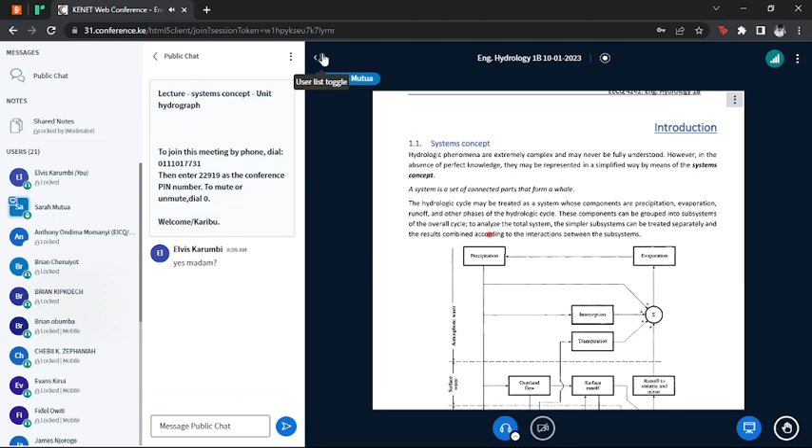A watershed is a very critical component of hydrology, especially surface water hydrology, because that is where the interactions of water occur. The watershed also includes the physical framework of hydrology, the surfaces on which water flows.

Those surfaces differ based on the types of soil, the types of land uses, and the slope. All those things determine how the water flows.

So if we add rainfall, imagine where you are, we account for all processes so that we account for all components of the hydrologic cycle.

It is rather a little bit complex.

Normally, in a very basic way of analyzing the hydrologic continuum, or the hydrologic landscape, in simple terms, we imagine the hydrologic landscape as a system.

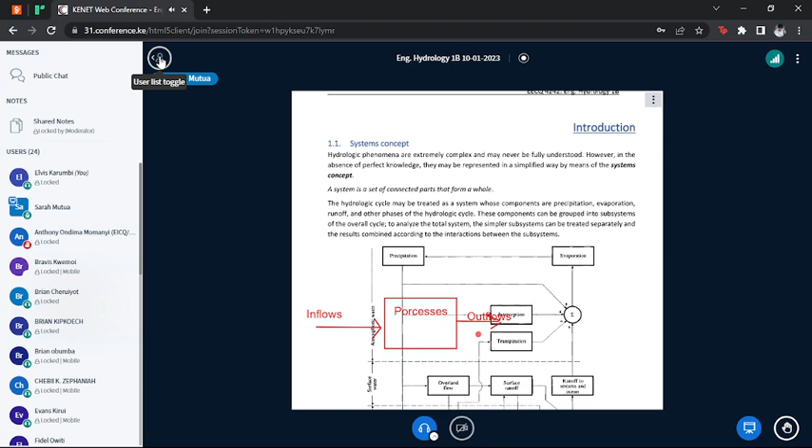If we remember generation of excess rainfall, there are a number of ways, for example the runoff coefficient method, whereby we have rainfall, then we lump together all processes through the runoff coefficient, which is usually a fraction between 0 and 1, and the outflow is the excess rainfall that generates overland flow. That is a basic example of a systems concept.

Why do I introduce it? Because we are going to apply it everywhere, almost everywhere, in what we are going to tackle, apart from the probability part.

When we go back to the course outline, the hydrologic flow routing is also a kind of lumped system, a systems concept. The hydraulic flow routing is based on physical principles and is a little bit more complex, but we will not be dealing with it in this course.

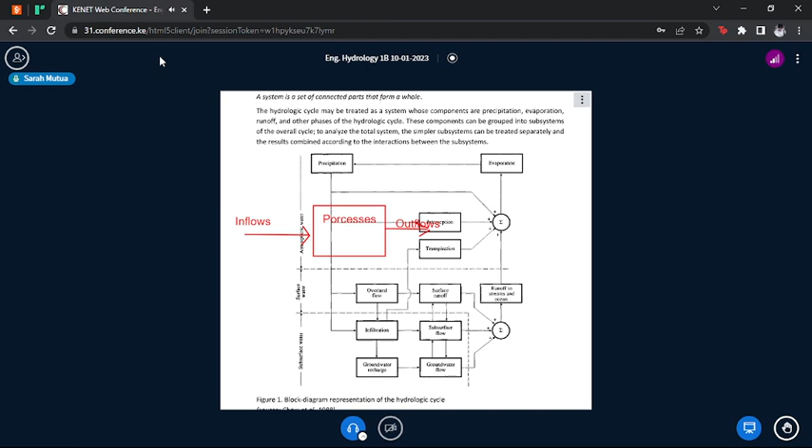Then we have subsurface water, things to do with infiltration and subsurface flow. When I talk about subsurface flow, we are talking about flow in the unsaturated zone. When infiltration is happening, there's usually a flow of water—a little bit complex because it is flow of water in a situation where the pores are not saturated. Then we have groundwater recharge.

I'm requesting you bear with me, but we have to do this.

We have groundwater recharge through percolation, and of course we have groundwater flow. Sometimes the groundwater flow, at the point where the groundwater in the shallow aquifer meets the ground surface, we have springs, and in that situation the water joins surface water.

So all this hydrologic cycle, when you look at it the way we have done it, we have created three systems: an atmospheric water system, a surface water system, and a subsurface water system, and all of them are interconnected because water moves from one system to another. You can also look at the hydrologic cycle as a whole, as a system.

Because of the complexity, when you are out in the field solving hydrologic problems, sometimes you find that you do not need to include all these components of the hydrologic cycle in your analysis. Most of the time, only a few processes are considered at a time. For example, if we want to calculate excess rainfall, we only need to know the precipitation, maybe the interception, and infiltration, so that we can calculate excess rainfall. We don't really need to know so many things.

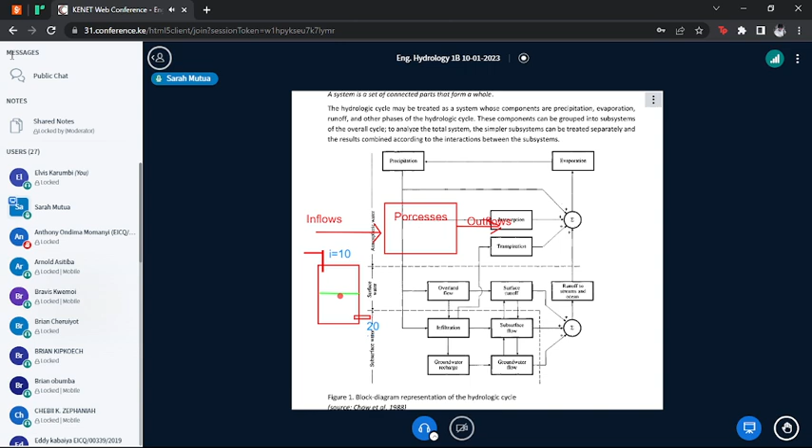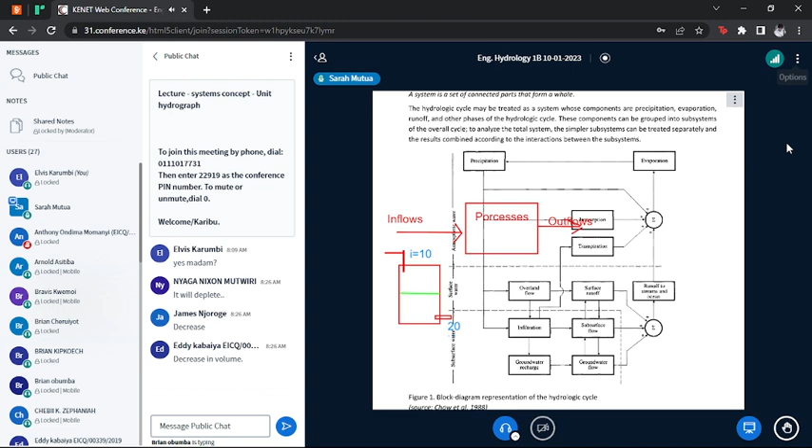Someone has spoken, give me a minute, I just need to get a cup of hot water. But someone has said it is going to decrease, and that is true because the water coming out of the system is more than the water coming into the system. So give me a minute.

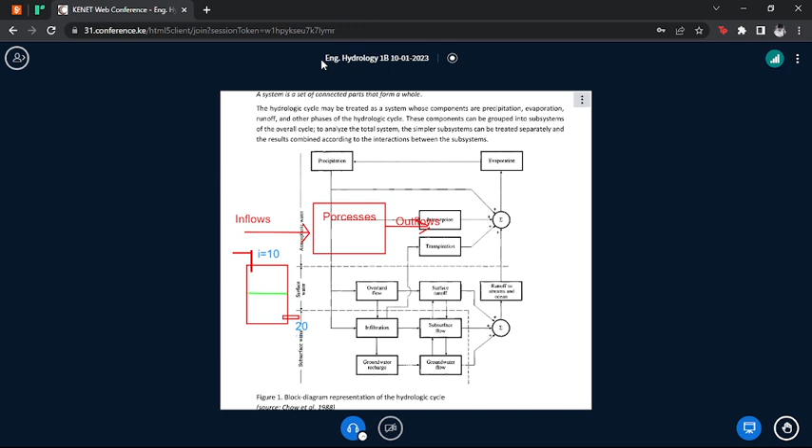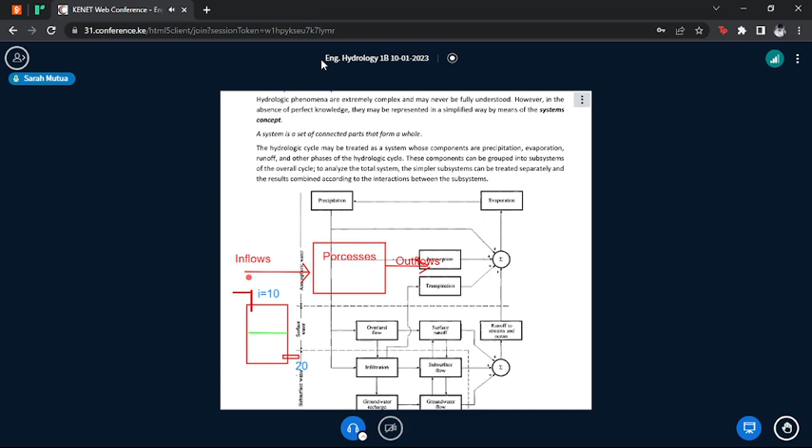So I'm back. The level will decrease, that is correct, and the vice versa applies. That is the conservation of mass. Actually, no, not conservation of mass, but continuity. Conservation means that you cannot destroy matter, but it can only change from one form to another.

Now when you look at this example I've given, we have a control volume, that is our reservoir, ile mtungi. Another aspect I have added into this system is that we have measured per hour, per given time. So we are quantifying all these things within a given time frame.

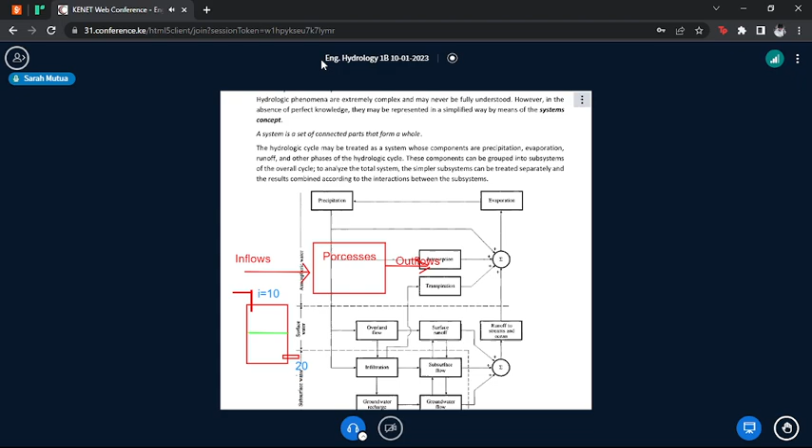So the hydrologic system can be defined as a structure, a system, where we have inflows per given time, outflows per given time, and an operator which lumps together all processes. We are not going into specifics, but the operator can be a function of evapotranspiration, land surface, slope, weather, and so many other aspects that affect the various components of the hydrologic cycle.

Now, in this hydrologic system, we have all kinds of processes operating: physical, chemical, biological. They operate on the media within the system to produce the outputs.

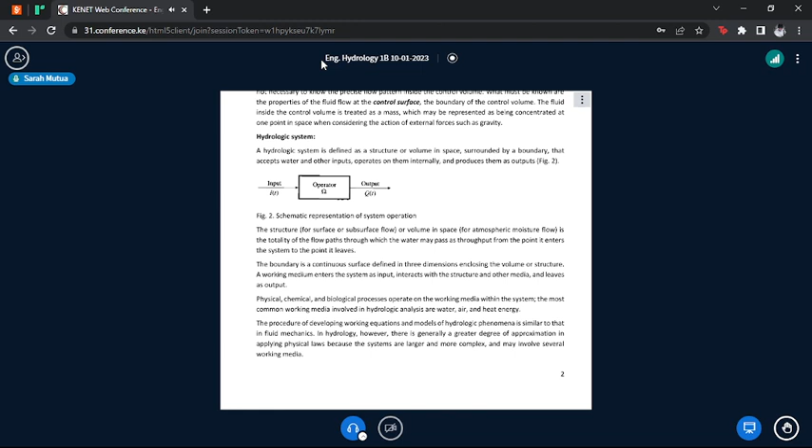If we look at an example, since I've really explained a lot about this systems concept: represent the storm rainfall-runoff process on a watershed as a hydrologic system. I already gave the calculation of excess rainfall, which is usually a rainfall-runoff kind of system. In this example, you have precipitation occurring within a watershed, and the boundary is the watershed divide. Inside this watershed you have processes, and the outflow is the stream flow. So basically, that is what we are going to be looking at at this level.

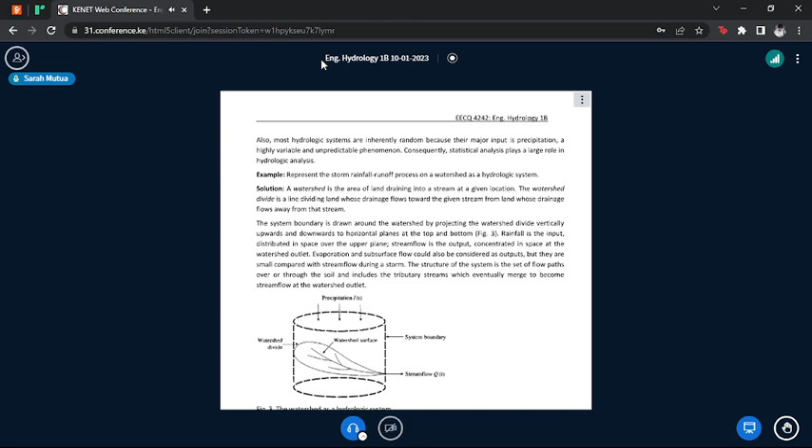When we look specifically at the hydrologic system model, it is a simplification. So how do we come from a hydrologic system to a hydrologic system model? Since we cannot represent the hydrologic framework accurately, comprehensively, or in detail in every part, in hydrology we usually use models, or some sort of representation of the system. When we convert the hydrologic continuum, the hydrologic system, into a representation, we no longer deal with the system per se, but a system model, mfano yake, a system model.

We have so many hydrologic models that have been developed, used to calculate many aspects. For example, you may find a model that calculates recharge, a rainfall-runoff model, a model used in river routing for river engineering, and a model that estimates evapotranspiration, and so forth.

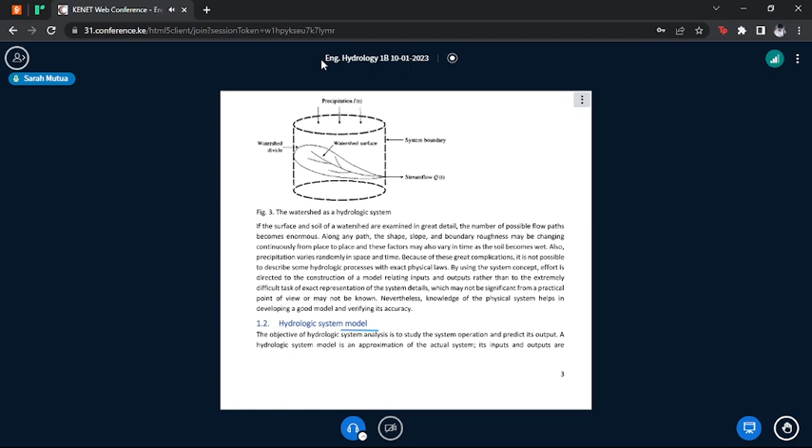It is usually basically an approximation of the actual system. So in such a model, if you assume I of t to be the inflow into the system, and Q of t to be the outflow, you can calculate Q of t as a function of I of t, an operator or process multiplied by the inflows. We can show, following this derivation, that these hydrologic systems can be expressed as K dQ/dt plus Q of t equals I of t, and this is a differential equation.

I don't know which one it is. With this level of equations, when did you cover them?

When did you do them? Because I cannot even remember how they are solved. It's been a long time, because at this level, when you get to where we are, some of us, the problems are usually solved for us. But basically, I want you to remember the numerical methods you did, or is it numerical methods? When did you do these differential equations? What did you call the course? Mathematics 1, 2, 3, or whatever.

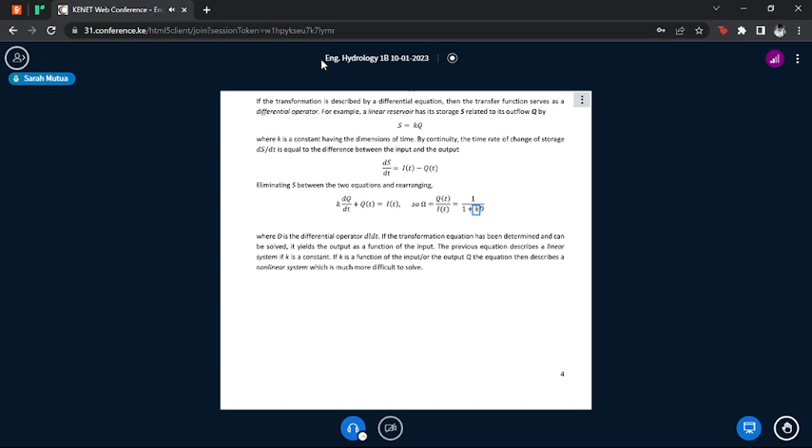Now, I have some questions here, but basically they are for solving this differential equation, and I want you people to solve it. Of course, this course is not about differential equations, but so that you can just remind yourselves of the mathematics we did, and how we can solve it. And once you have done it, we can come and share and discuss the results.

Any question about the systems approach?

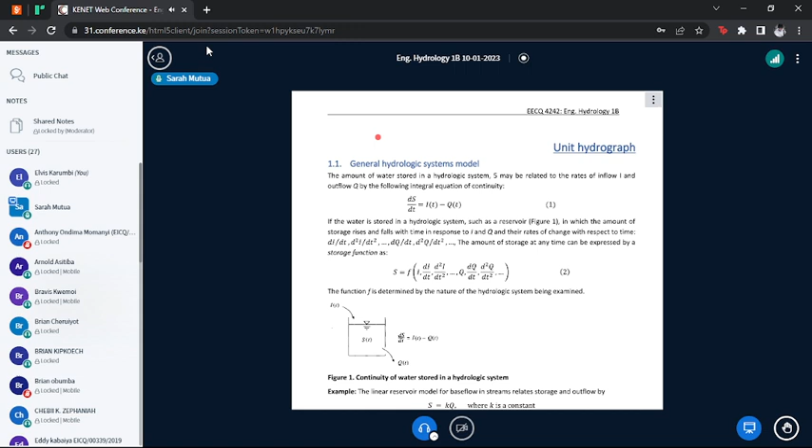Okay, so we continue and we start with the unit hydrograph. I divided the unit hydrograph part into two because first I wanted us to look a little bit at the background, the theoretical background of it before we go to it. So this first part will just be the theoretical background, introducing the principles, the physical principles behind it, and the assumptions and characteristics of it.

So we have, when we consider generally the hydrology systems model, like I have explained before about the systems concept, change in storage over a period, over a finite period, is a function of inflow and the outflows. So in short, storage equals the inflows minus the outflows. So in short, the storage, the left-hand side, is a function of a set of an inflow function and an outflow function.

And usually the function is determined by the nature of the hydrologic system being examined. For example, you may just find that F equals I minus Q, or F equals I plus dI/dt minus Q minus dQ/dt, up to the first order differentials. And they can go up to as many derivatives as possible. So that is one, the continuity concept.

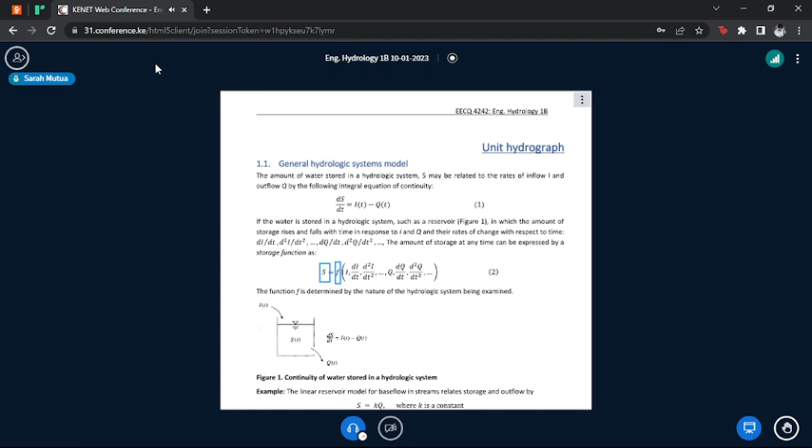And I think I already kind of tried to use the wash hands basin in restaurants to try and explain the continuity function of water stored in a reservoir. However, I want to add a little bit further.

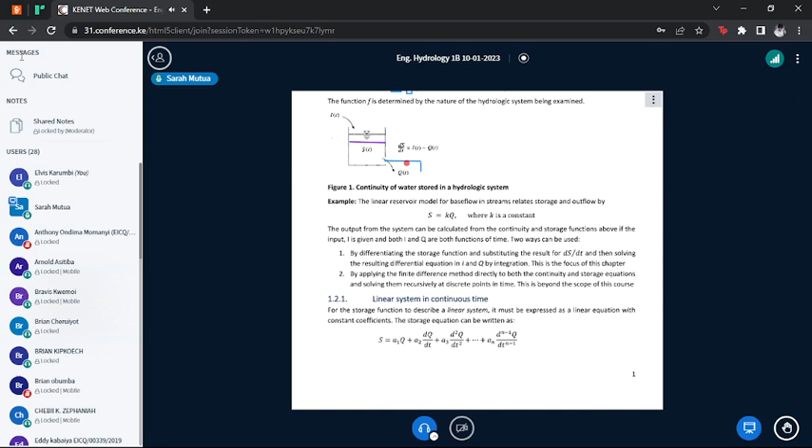And I want to ask a question. Assuming that the... I don't know which English word to use, but assuming when the water is at this level... sorry, let me undo, I will use a straight line. The water or the stream of water flows out horizontally due to pressure, and it discharges at that point. Assume it is a smooth line. What do you think will happen if the water level drops, say to this part? Will the stream of water go that far? Will it go further, or will it come nearer the tank? I don't know whether I'm clear.

Assuming at the level that we have in this image, the stream of water goes almost, let us assume this is 1 meter away from the tank, before it starts to drop. If the water level decreases, will the stream come closer? Will the water fall closer or further away from the tank? It will fall closer. It will fall closer. And why?

Why? Because the water pressure has dropped. And if it is higher, it will fall further away from the tank. So here, the water stored in the tank has a relationship with the outflow.

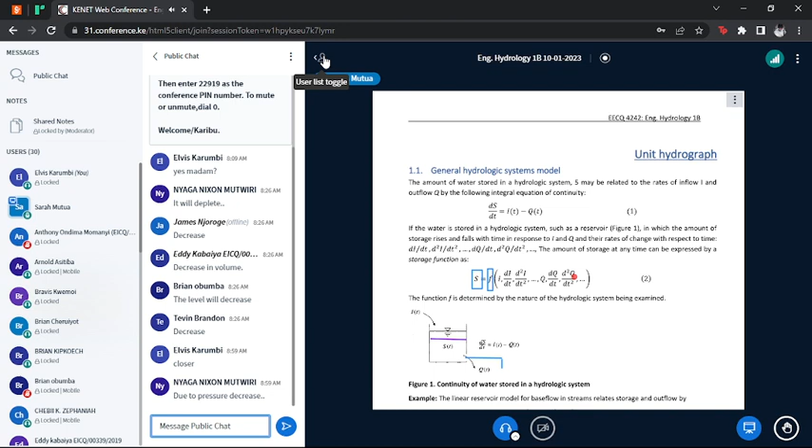So the storage, we have seen previously, can be written as a function in a hydrologic system, as a function of inflows and outflows into the system using the continuity equation. But we come and see again, storage can be written as a function of discharge alone.

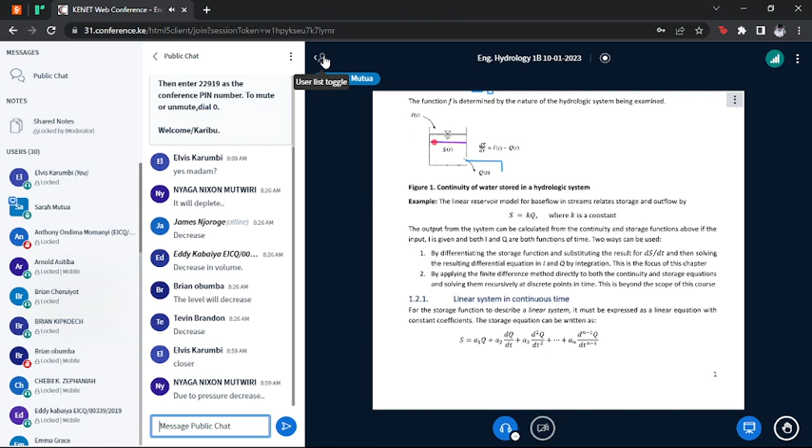If we differentiate the storage function represented in equation 2, as a function of Q alone, then it is going to be possible for us to equate these two equations. Now, before I go further, any system where storage is a function of discharge is usually called a linear system.

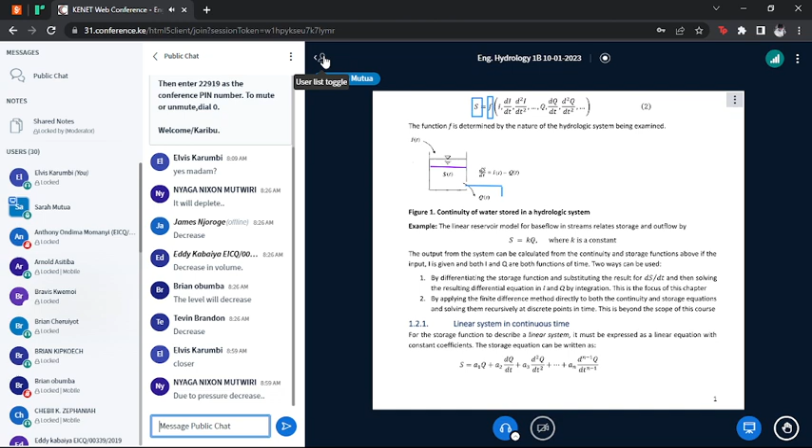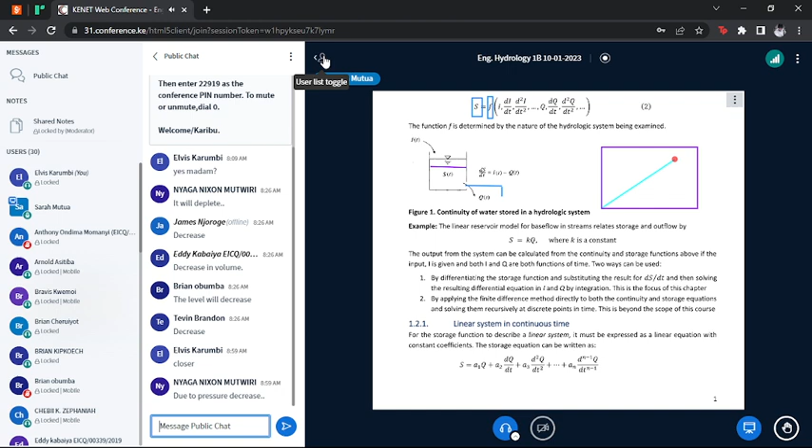And when I talk about a linear system, I'm not talking about a situation whereby you have a graph and the relationship is linear. No, a linear system. We can have a linear model, but a linear model is whereby you can correlate x and y values using a straight line. But a linear system in this case is a system whereby the storage and outflow are correlated.

For example, an example of a linear system is the system of base flow. Base flow is the groundwater contribution to river flow. Let me explain it a little bit.

When after rainfall, infiltration has happened, we have recharge of groundwater if conditions allow. And if you look at groundwater as a reservoir, of course include imaginary boundaries. So look at groundwater as a reservoir, and you have added recharge through percolation. Water in the groundwater reservoir is going to increase.

And because of that, you notice water flow in springs, in streams, for those who come from rural areas. The water flow also increases. Why? Because the groundwater reservoir water has increased.

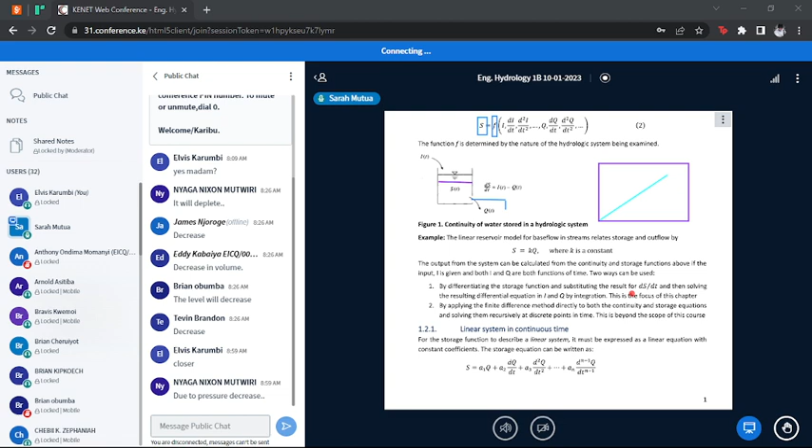Inflow into the system. And if you differentiate that previous equation, and substituting that equation in our very first equation, the continuity equation, then...

you come to equation 4, which is basically the general hydrologic system model. It is a general hydrologic system model. And like I've said, it describes a lumped system because it contains derivatives with respect to time alone, only time and not spatial dimensions.

And I have briefly talked about the linear reservoir model. It is a special case of the general hydrologic model where A1 is equal to K, and all other derivatives, all other coefficients are equal to 0.

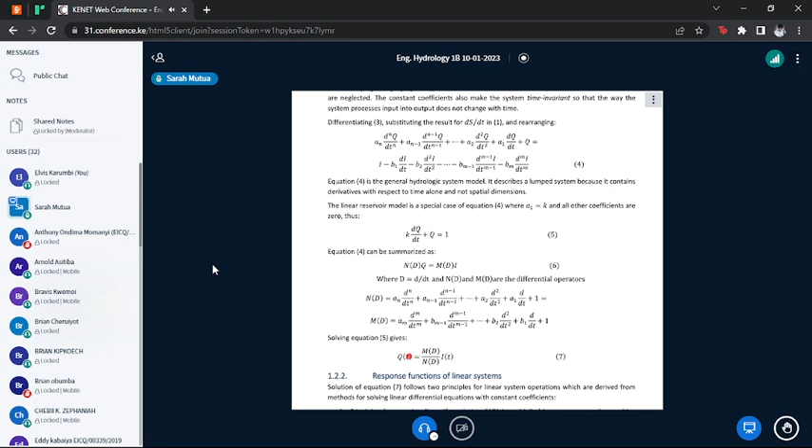And finally, you have the linear reservoir model being written in that format. What we have below is just a rewrite, trying to simplify these long expressions into a simplified format. For example, M of D is the inflow function, and n of d is the outflow function.

And in this case, it is not solving equation 5, but it is solving equation 6. You get the discharge, because most of the time we're interested in the discharge as a function of the function of inflow divided by the function of outflows.

So basically, when we'll be looking at the unit hydrograph, these two concepts, the continuity equation and storage functions, we will be basically solving continuity and storage.

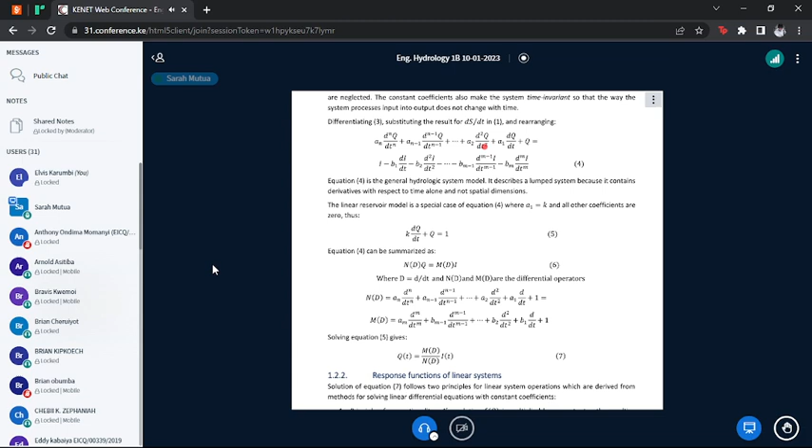The functions of linear systems. What are the functions of linear systems?

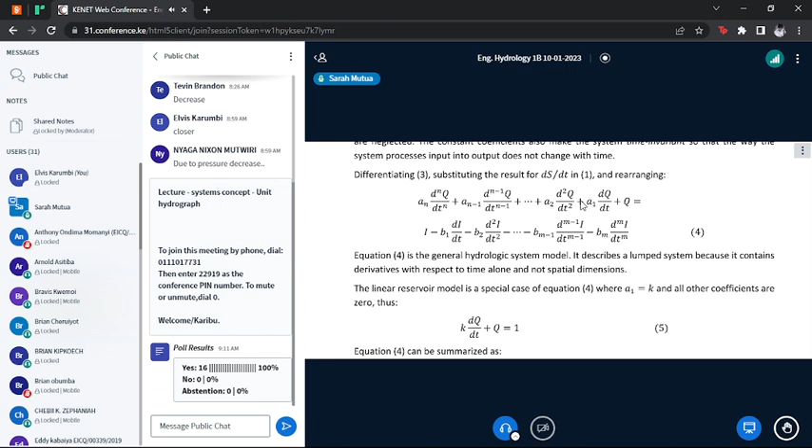For example, Eddy Kabaiya, Emma Grace, Sharon Awino, Tevin Brandon - those are the only ones here. I tend to note this kind of name: Eddy Kabaiya, Sharon Awino, Tevin Brandon. I can assure you those two just joined. Sharon Awino and Tevin Brandon, they are just humoring us.

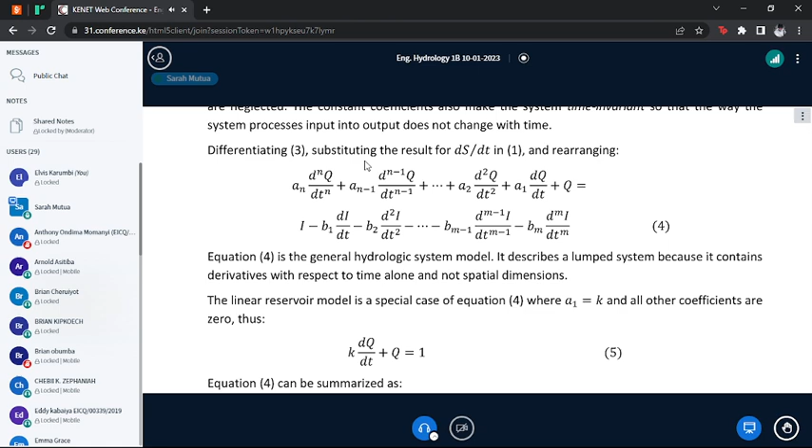Where are we? We are now talking about response functions for linear systems. And what are these functions?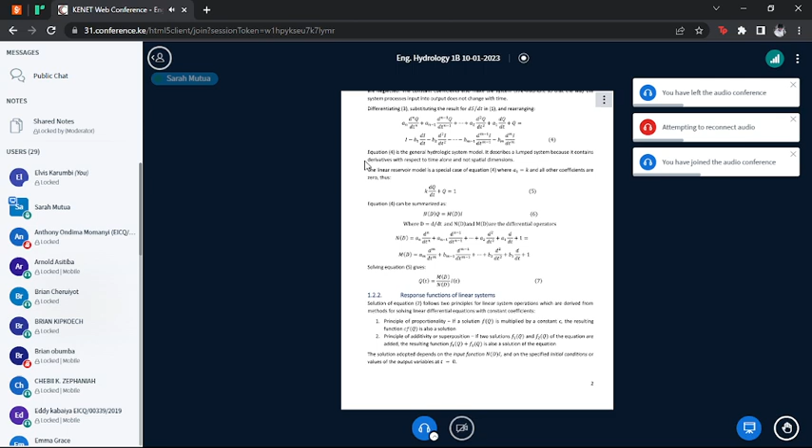The combined inflow and outflow function. And those functions, the MD and the ND, they follow principles. They follow two principles. What are these principles?

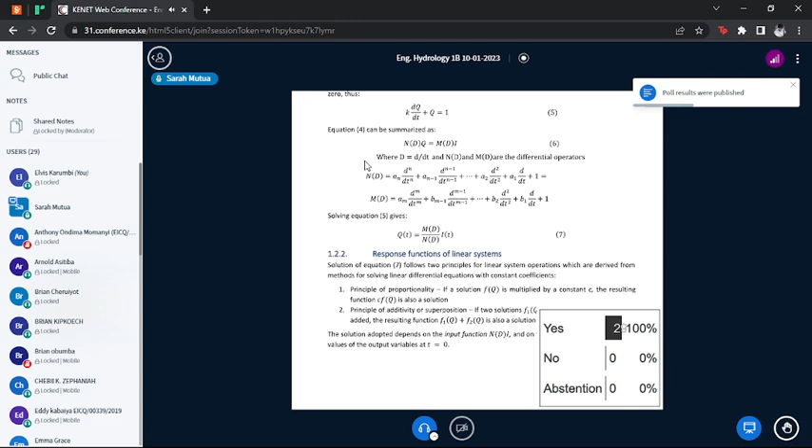Which are these principles? One is a principle of proportionality, and the other one is principle of additivity or superposition. What is a principle of proportionality?

The second principle is that of additivity, and that is rather obvious - principle of additivity or superposition. If two solutions, f1 of q and f2 of q, of an equation are added, the resulting function f1 of q plus f2 of q is also a solution of the equation.

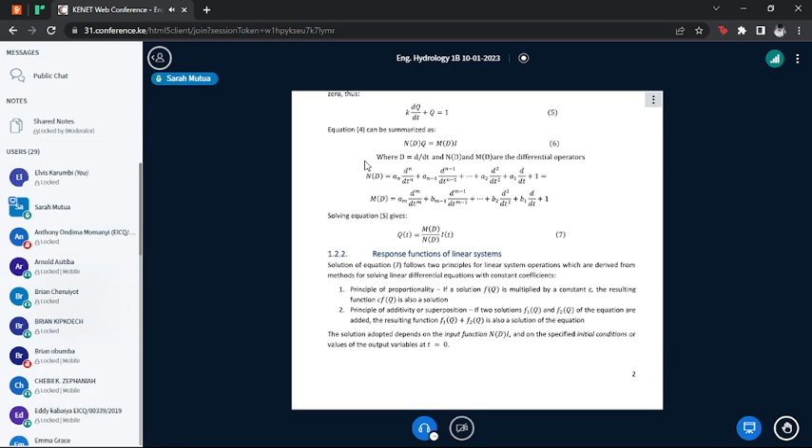And we are going to apply those two principles to discuss a number of functions that are used in hydrologic systems. One is the impulse response function.

Now, I want to take a break, because when I'm talking about these hydrologic functions and systems, I've been using rainfall runoff. I want to give another example so that we can really understand what we are talking about here.

If we have a river, and in this river we have measured the discharge at this point, we know the amount of water at point A, and then we have water at point B. If the water is getting into point A - assume there's no seepage from the bed of the river and such - let us imagine only the inflow into the system alone, and the only outflow is outflow from this segment of the river.

So any hydrologic system or any hydrologic part can be represented with a linear model. You can do watershed rainfall runoff, you can do base flow, you can do even river flow. Imagine any kind of hydrologic representation, any component of the hydrologic cycle - you can represent it as a linear model, due to the fact that most of these hydrologic systems you can express as linear models.

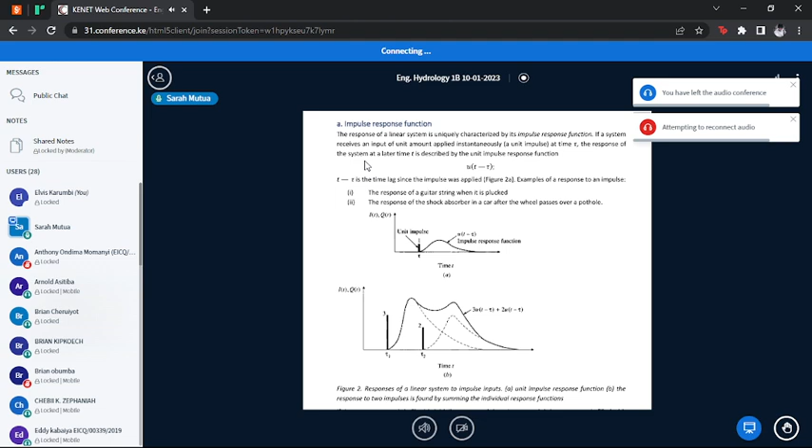The solution that we obtain from equation 7 depends on, if you consider these principles, the input function and initial conditions - the values of the output. And in the initial conditions, we take time t to be equal to 0.

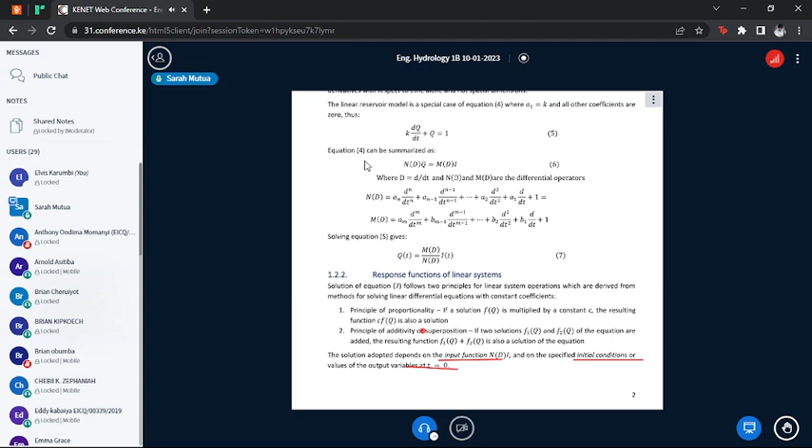And if we do not take it as that, it is time t - in this kind of case, when we're doing any calculations, your initial conditions are that period when you start assessing or analyzing your system.

So we have the impulse response function, and the impulse response function is basically - or rather, the response of a linear system can be uniquely characterized by its impulse response function.

That is, if a system receives an input of unit amount applied instantaneously. When we talk about instantaneously, we are talking about a time so short you cannot measure it - you are applying it instantaneously.

A unit impulse at time tau - the response at a later time t is described by the unit impulse function: q is equal to u, which is a function of t, by the function u of t minus tau. And tau is the initial time.

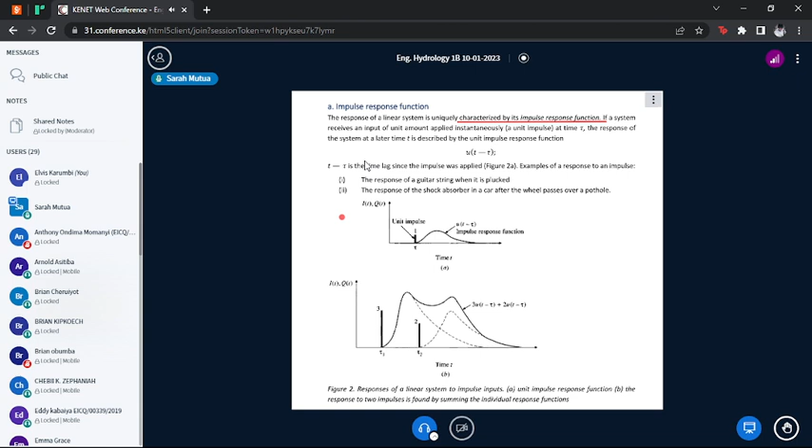So here we have an impulse, let's say rainfall, and then the response will be the storm hydrograph, for example. But in this case, it is a unit impulse.

Examples of response to an impulse are a guitar string when it is plucked, or a drum as I gave before. Response of the shock absorber in a car after the wheel passes over a pothole.

Now, using the principles of additivity or superposition, if you have two impulses, one given at time tau 1 and tau 2, using the principle of superposition or additivity, you can find that the response is no longer just a single impulse, but you can add those two responses together to get your final result.

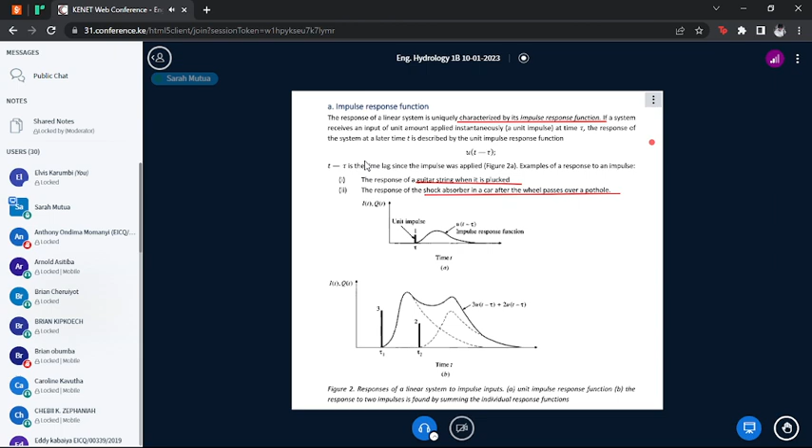So in short, why is this important? Because when we have rainfall, we do not only have one drop, but continuous rainfall. And because of that, a continuous input can be treated as a sum of infinitesimal impulses.

So you can measure rainfall hourly, with your unit of measure being 1 hour. You can measure rainfall from 8 to 9, then from 9 to 10, from 10 to 11, and so on. And to get the total output, you add the responses.

Before adding the responses, if you measure the rainfall from 8 to 9 and find it is, let's say, 5 units, and then from 9 to 10 you measure 2 units - using the principle of proportionality, 5 times 1 is also a solution.

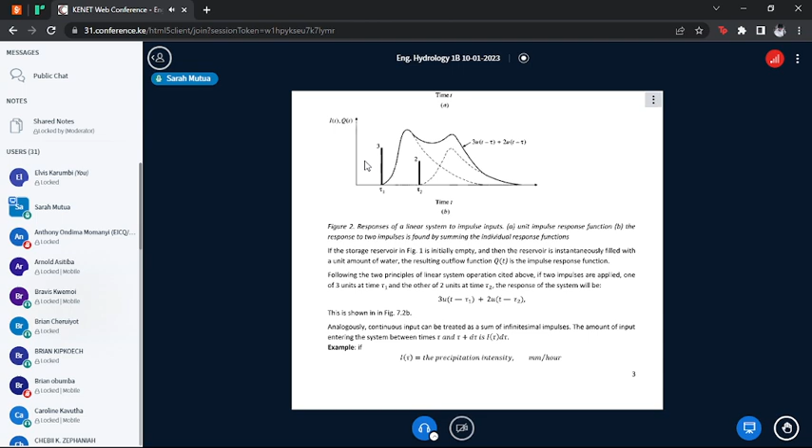It should be in the next figure, in part A. Let's see where it is, because the other one was the principle of superposition. So this is the application of the convolution integral. The I of tau d tau is the instantaneous rainfall.

From this instantaneous rainfall, you receive a unit impulse. But remember, since the rain is starting from time t0, the response is due to summation of so many instantaneous rainfalls. So the convolution equation is going to be very critical in generating the summarized equations for convolution and deconvolution, used for calculating the unit hydrograph.

Now, in most hydrologic applications, we need solutions at discrete time intervals - 10 minutes, 1 hour, 1 day, and so on. In order to handle such kind of input, we have two other functions: the step response function and the unit pulse response function. We will look at those before we end the class today.

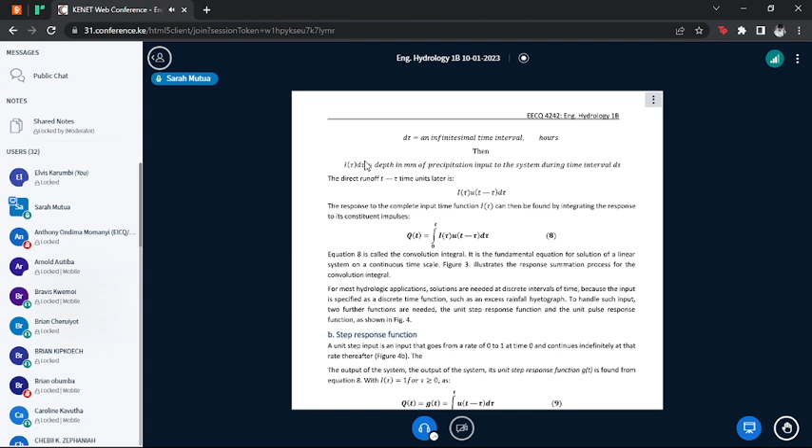So the step response function - in this case, you assume that an input goes from 0 to 1 at time 0 instantaneously and continues indefinitely at that rate thereafter. Let me see whether we can see it in an image. That should be shown in figure 4. Let me see where figure 4 is.

At time 0, the input goes from 0 to 1 and continues infinitely at that rate. So the resulting response is an S shape. Remember the impulse response function - we add just an impulse at time 0, but now in the step, it continues infinitely, starting from 0 to 1. So the output function is an S shape.

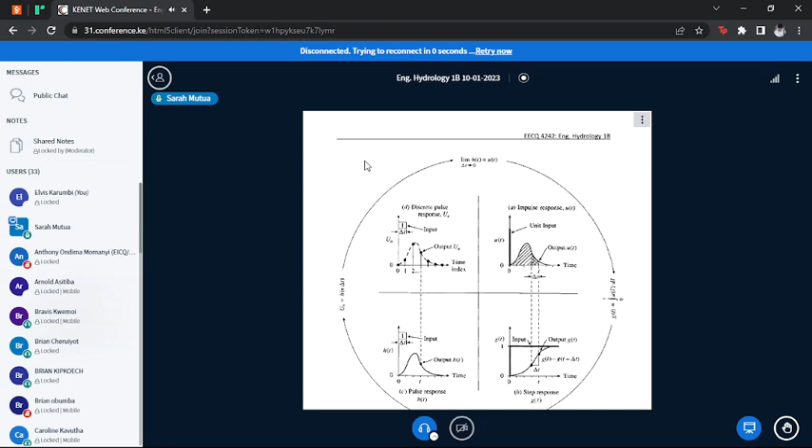The time limit when tau equals t becomes L equals t minus t, which equals 0. And the time limit when tau equals 0 becomes L equals t minus 0, which equals t. Therefore g of t equals the integral from minus t to 0 of u(L) dL, or g of t equals the integral from 0 to t of u(L) dL, because if you change from a minus sign starting at 0 as opposed to t, that negative value disappears.

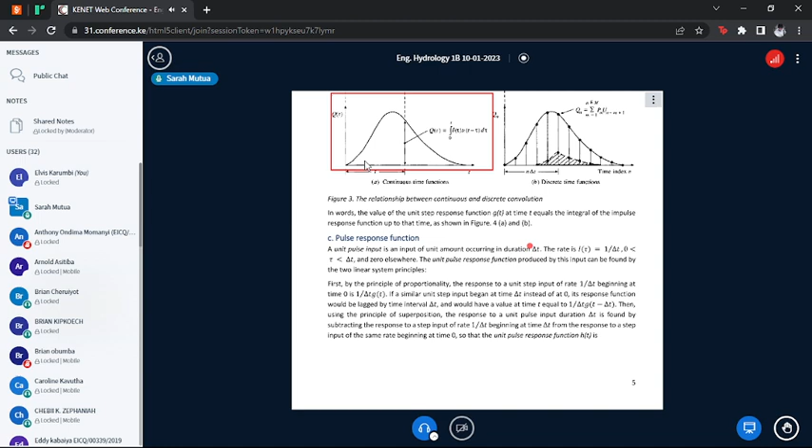Then we go to the pulse response function. The pulse response function is a response to a unit pulse input, an input of unit amount occurring at duration dt. In this case, we now start introducing discretization - the input is no longer continuous, but we can specify that the input occurs at a rate of 1 over dt, 1 per time, like 1 millimeter per hour.

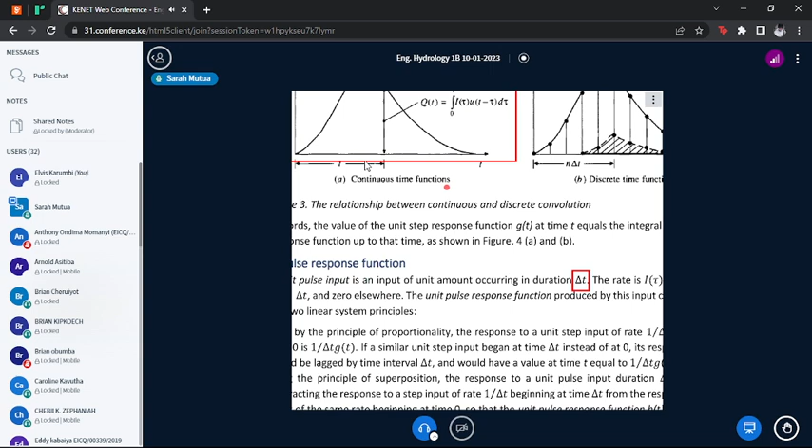So I of t is 1/dt for 0 less than tau, and tau less than dt - that impulse unit value is measured between time 0 and dt, but it is 0 elsewhere. We only have that particular impulse, not before, not after. In order to calculate the output from that system, we apply the two principles we learned: the principle of superposition and the principle of proportionality. Let me see if I can get this one in the next.

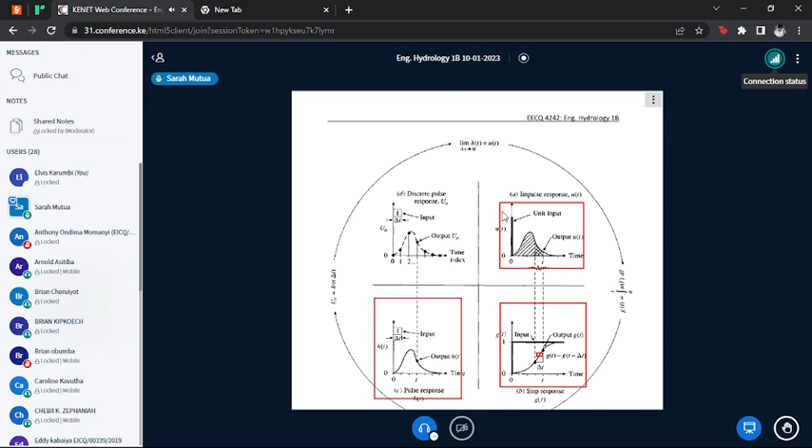So what I'm saying is you start with a unit impulse response, get from that a step response, a continuous step response. You get a response and you can discretize it to get a discrete pulse response function u(n). This discrete pulse response function is usually the one that forms the basis of calculating the unit hydrograph, in an example that I have given, which you can follow.

Hello, good morning, Joanne. Did you manage to get an attachment? Not yet. Okay, I'm waiting for a response from Kenha. Once I get it...

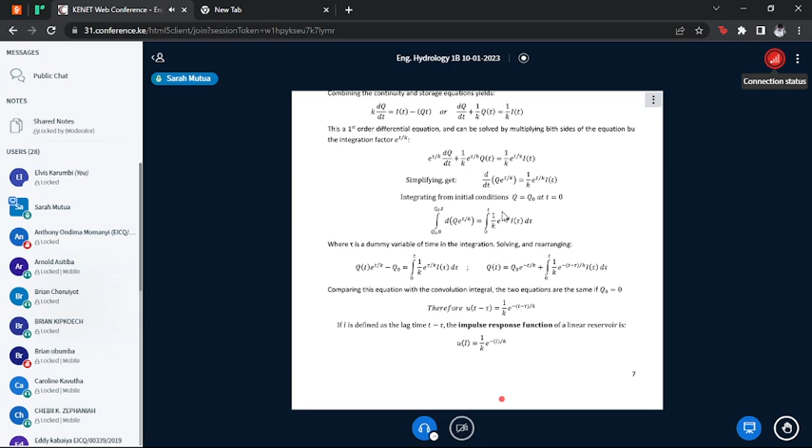So the impulse, step, and pulse response functions of a linear reservoir with storage constant k, S equals kQ, with a storage constant K, and the storage equation is S equals Kq. I have given the solution there. You can follow to try and get a gist of how the three responses are correlated.

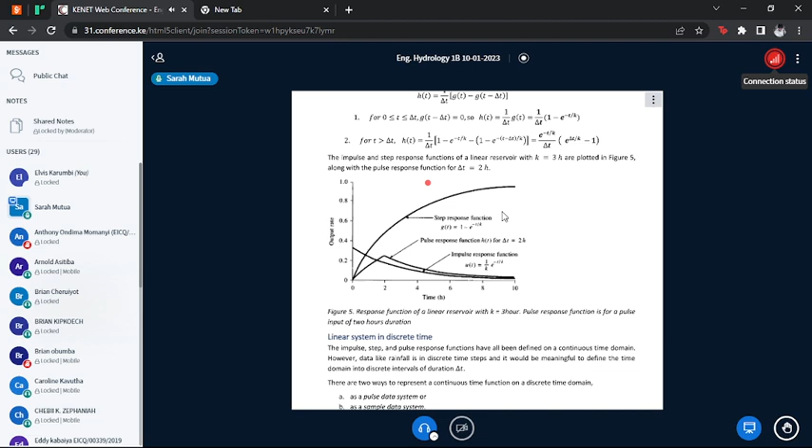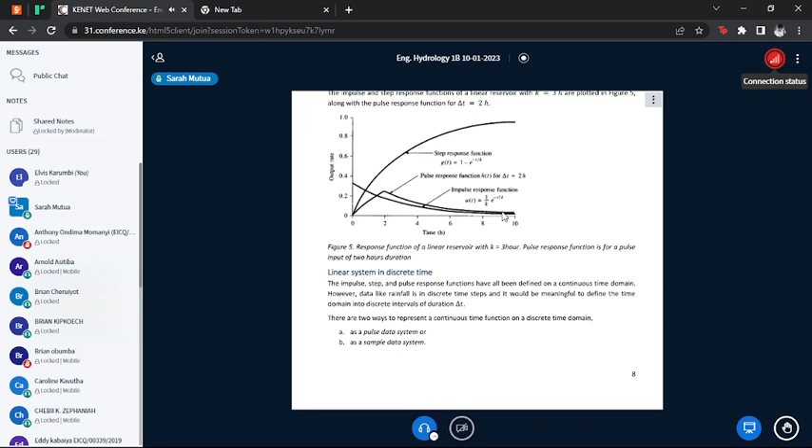Further, I have given an example of if K is 3 hours and dt is 2 hours, how the response functions would look like. So we have looked at linear systems as continuous functions, but now we can look at linear systems in discrete time. I want to leave this at this point so that next time, this was a lot as an introduction, so that you can look at it and try to internalize it, and we'll come and start with linear systems in discrete time.

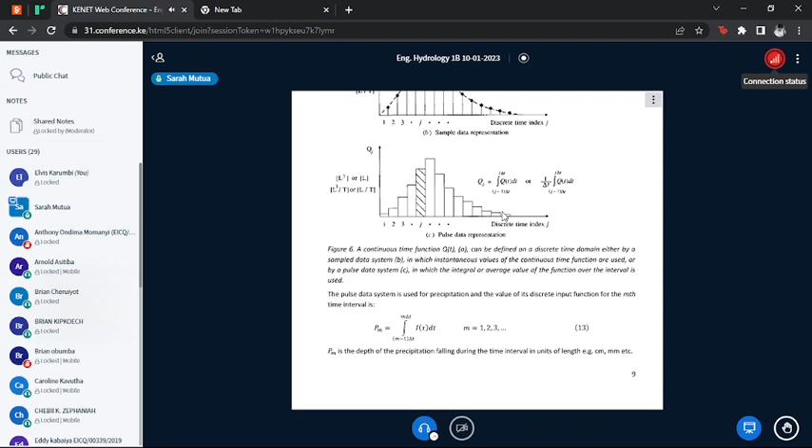You'll tell me when we can have it. If you create extra time, we can still go through it at any given time. Normally we would have finished this, but we can always finish it later.